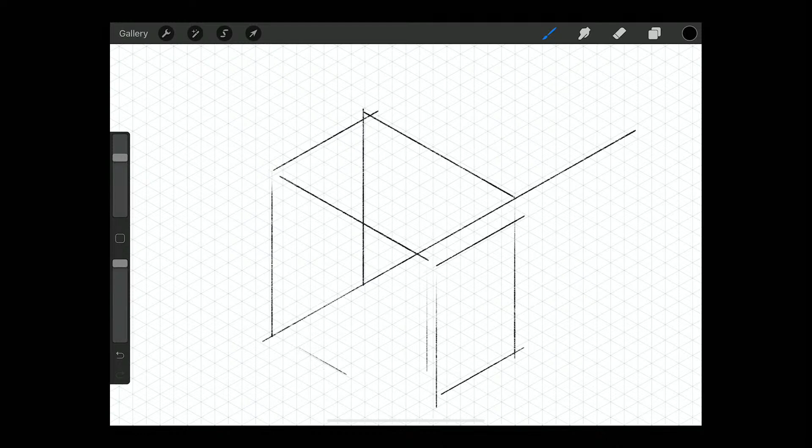And I've just found it really, really helpful for doing builds. The build that Jake just did, we did a sketch out of here and it was really helpful. So what I found is using the pencil, you can kind of get the overall shape really well. We were looking at kind of the design, and the good thing about this too is like you're not actually putting pencil to paper and having to erase, right?

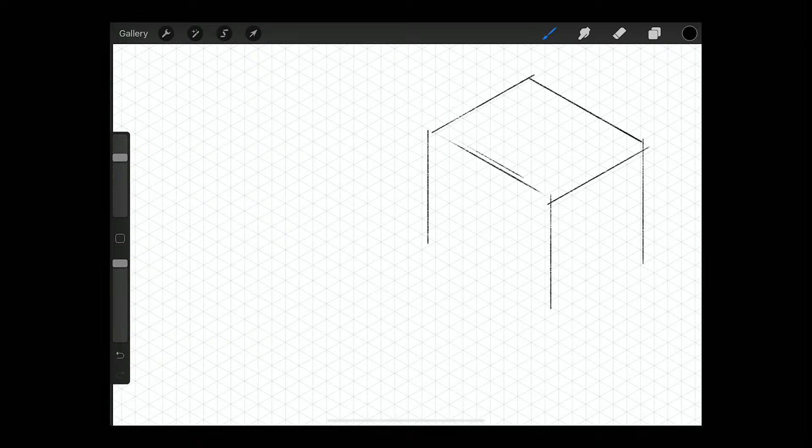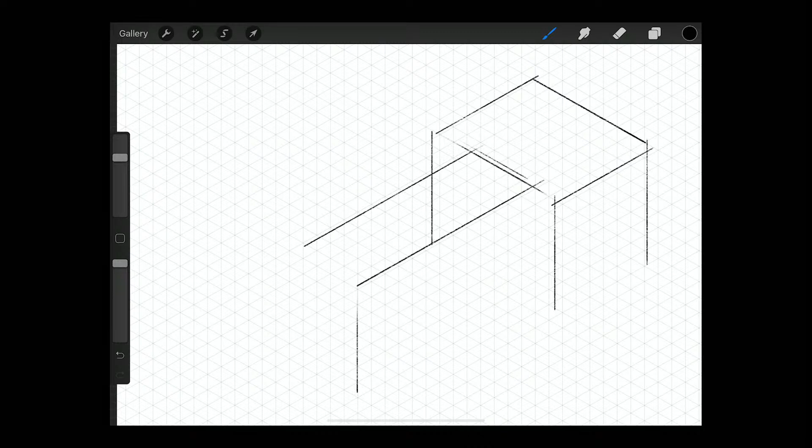So it's really easy to change your ideas, put something down without too much worry. So what if that was a platform and then you had a bridge like we were seeing that goes across, and then maybe goes into - it goes all the way across - and then we had that angled part, which could be cool. Let's see, oh, the kind of V-shaped thing - I think that's probably really easy to make with MakerPipe. Have a little section here and some supports there.

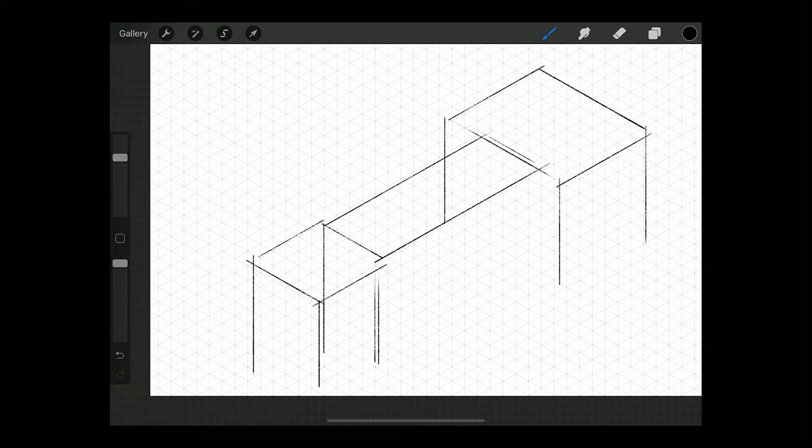And another cool thing is you can twist it all around and grab it and zoom it in and zoom it back out. I love this thing, it's awesome. So yeah, but here's where I can't - with the drawing assist, I can't do an angled.

Oh wait, oh that's not the right perspective though. The ground would kind of be in this region right here. I'm going to reference lines - you can do this on the left where you change the opacity. So if I wanted the ground lines to be a little bit less defined, could do it like that.

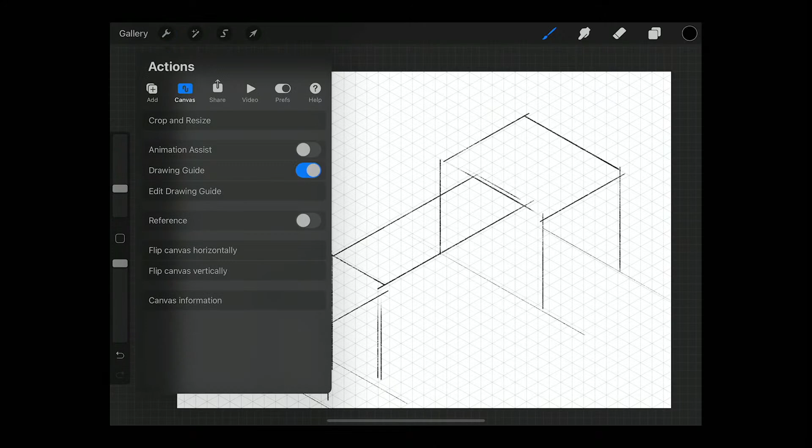Yeah, so let's take the drawing assist off. Take the drawing assist off, and then we can - now you're going to see my real sketching ability, which, yeah. That's cool that you can like hot swap between the drawing assist and then just normal. Yeah, I mean you can turn it off and on.

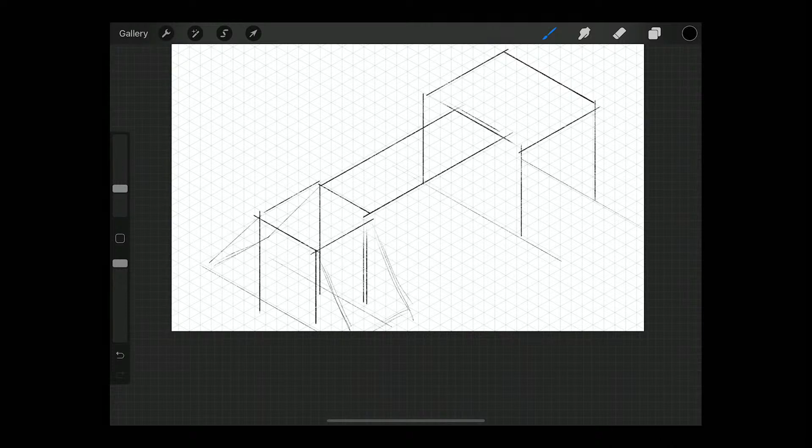And this is a neat feature too - like if you draw a line and then hold it at the end, it'll actually snap and you can move it around. So that's like the back side of the section there. And then I'm going to turn on the - whoa, see all Bailey's drawings. She likes this as much as I do.

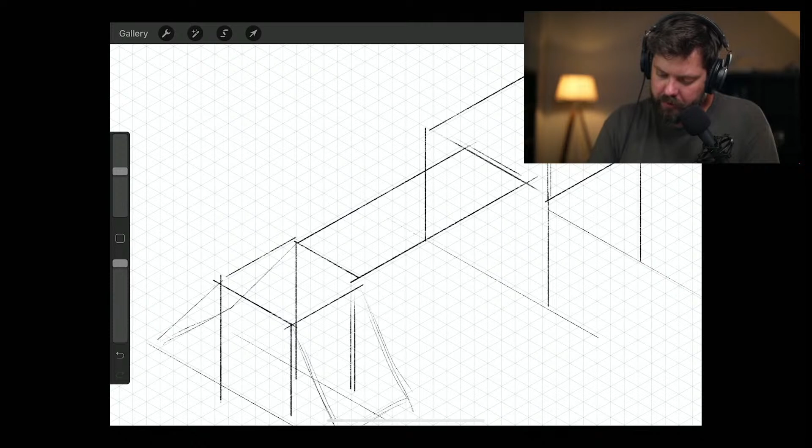All right, and then we're definitely going to need some sort of railing system. So that - you need a ladder, yeah? Yeah. Some sort of railing system over there, and then certainly to go across as well. Or some ropes would be cool there, probably.

I wonder if you could maybe run a T where you clamp it to the pipe, the vertical, and then you have the kind of - I don't know how to describe it - it's like the bottom is clamped, but you leave the top, you don't put a pipe in that one, and you just run a rope through it. Oh yeah, that'd be cool. I've seen that somewhere, I'm not sure. I know some - oh, with drone gates. Somebody did that with drone gates where they suspended a barrier, or it was basically a banner.

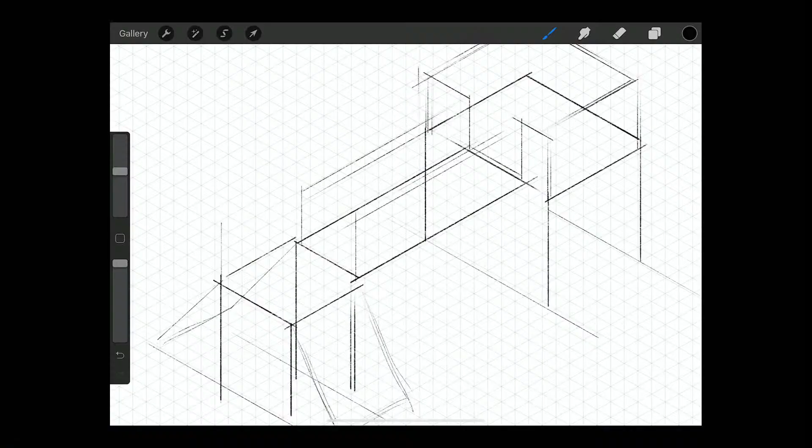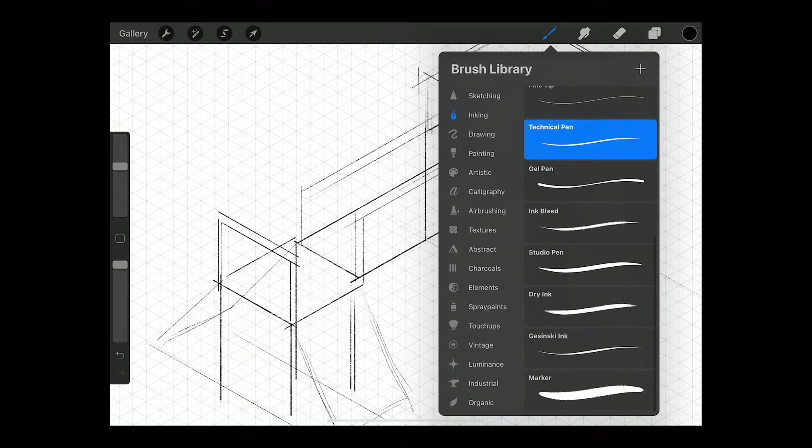And then we'll do kind of a section over here as a railing. So it's starting to take shape. And another cool thing is you're dealing with layers - so we did that all on layer 1, and then if we want to add another layer where we kind of ink it or get it a little bit more permanent, maybe do some different colors, then we can do that on a different layer. So I've been digging this studio pen as another layer, and again you can adjust the size over here.

So let me turn on the drawing assist again.

There we go, so we'll do this in silver. Start sketching out the conduit. Whoa, 1 inch is big. Yeah, it's a lot bigger. Actual size. Yes.

Something like that. Yeah, that's pretty good. Maybe we'll go a little bit darker.

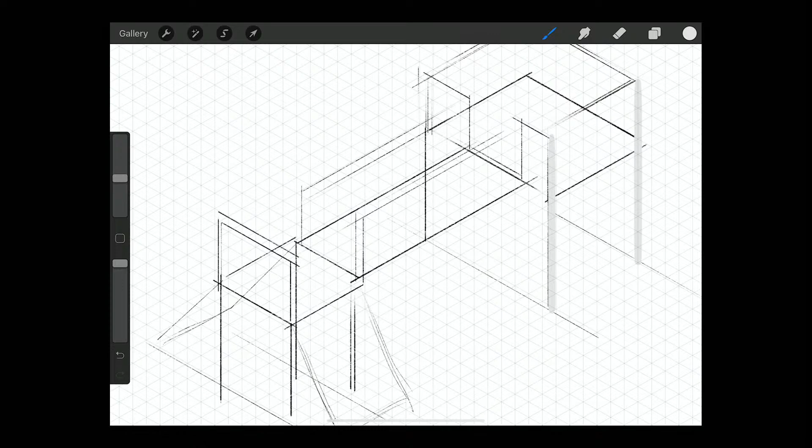I've always wanted to be like Bob Ross, rest in peace. This is my chance. Although, what does he say? There are no accidents, there are no mistakes, just happy accidents. That's good, Jake. Your generation loves Bob Ross too. Not to get the age thing again, yeah, I've watched my fair share of Bob.

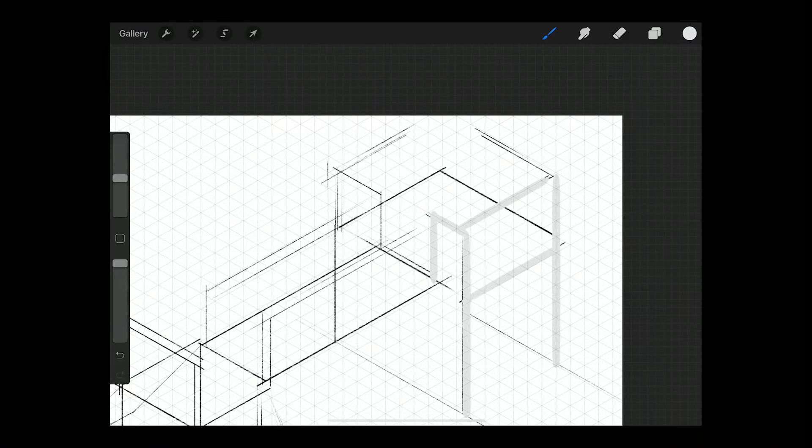They used to stream continuously, back to back to back, episodes of Bob Ross, which I think they might still do. I don't know if it's on the YouTube channel still. I think you can still watch it on Netflix. Really? That'd be cool. Yeah, I remember catching him on public TV, I think.

You know, he used to be a drill sergeant. No way. No way. Yep. He was a drill sergeant for like the first 20 years of his professional career.

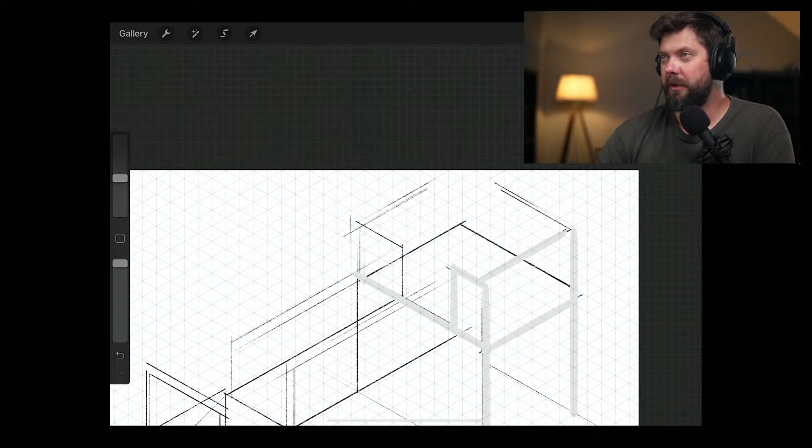Not that I don't believe you, but we've got to Google that. I promise. I'm Googling it right now. Fact check. Oh, it's coming up. Bob Ross, drill instructor. What? No way, look at that. His military career. Right on. Air Force. Cool, okay.

I would never steer you wrong with Bob Ross. Your Bob Ross knowledge is deep. Okay, we don't have to go.

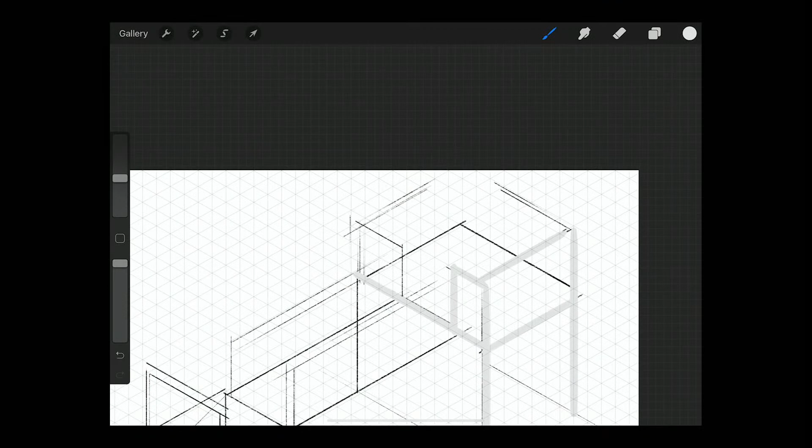We've verified that. Javier said he could imagine some glamping tents, certainly with 1 inch. Oh right, that would be cool. Have we had that? What do they call it, a yurt, right? Yeah. Fabric, correct.

I was trying to find a fun place for us to go for Dave's birthday, and I was looking at a yurt rental, and they seem pretty interesting. Yeah, loved by nomadic people everywhere.

My mom and sister just went glamping, I guess it was my sister's birthday, up in Asheville. They enjoyed it, in a camper. It was like a glamping, I think it might have been a yurt. But they enjoyed it, they were surprised. They weren't expecting to make it through it all the way. And they stayed and liked it. So, yeah.

Has anybody in the chat ever been glamping before? I'm not sure if we've got some glampers in the chat.

All right, so what I got here, I'm trying to think now, like okay, how would we actually lay this out if it was actual conduit, right? So I'm thinking a little bit more about structurally how it would be. And I think just a large rectangle, you'd have to anchor the 1 inch in the ground somehow. Let's see how we can.

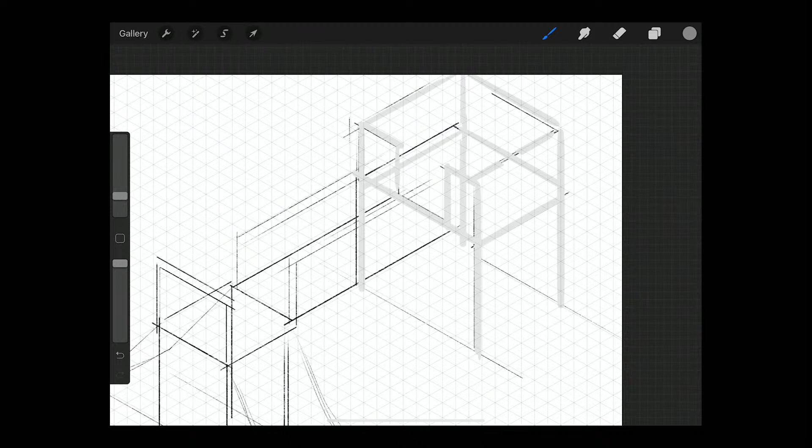You know what I saw? I saw one gentleman, he cast it into concrete and made a footing in the community. That was pretty cool. And then we had the kayak rack where he used kind of off-the-shelf footings that you can buy and just put the conduit on it, which I thought was a cool way to do it as well.

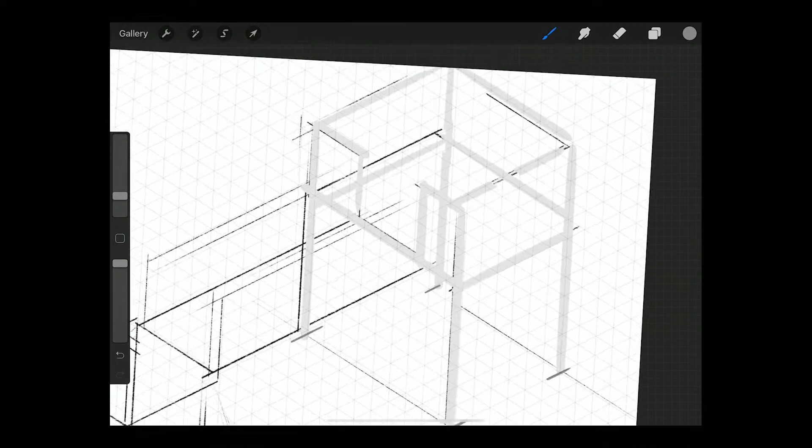I think I might check that out. But this is neat, you can take in any color that you've already done. You can look at that and bring that back.

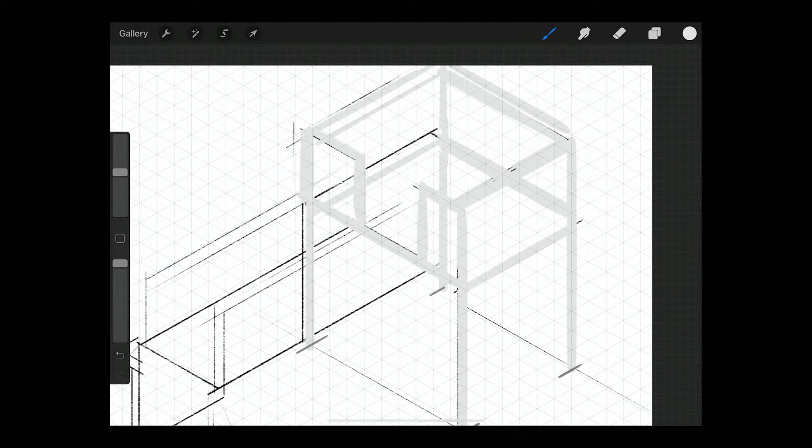Okay, so I've got kind of that structure where I've got 4 posts. This bottom outlines the base of it, the floor of it, and then some sort of sides and railings. I don't know what I'd use for the railings other than the conduit. And then these kind of branch over and interrupt with a T coming up this way and a T coming up that way. This would kind of go across there.

And then I liked somebody's idea, the pirate ropes. Yeah, Javier mentioned that was his favorite jungle gym activity. So definitely, oh yeah, right on. So instead of that, see if we can get some rope.

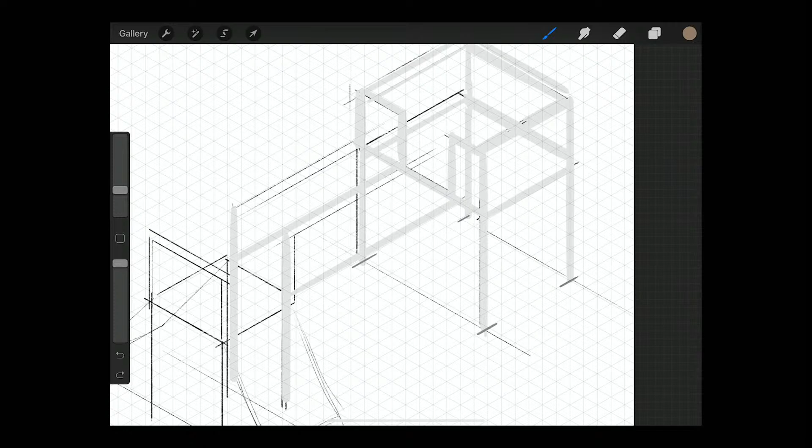Whoa, I think monkey bars make sense too. Monkey bars on the bottom. Yeah, that'd be perfect, good idea. So rope on the top and then monkey bars on the bottom, which would be challenging to get across for sure. Might be fun.

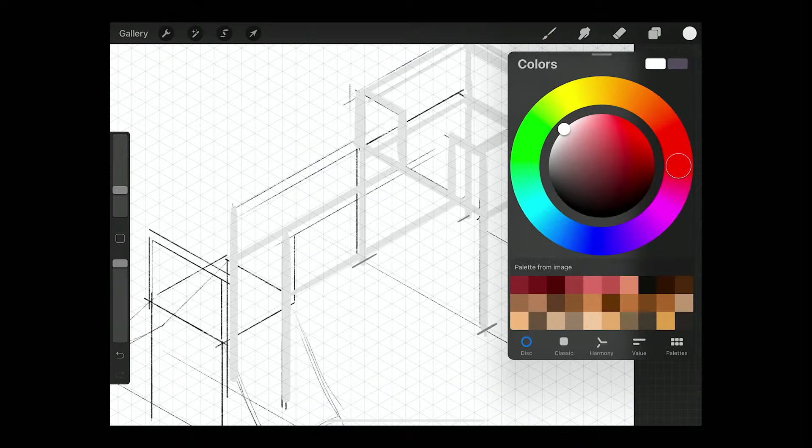What was I going to do? Oh yeah, take the assist drawing off. So I can do this rope. See if we can do a rope here. This is cool because you can draw in whatever direction you draw best.

Oh, on eraser - huh, if you double tap the pencil it turns into eraser, which is wild.

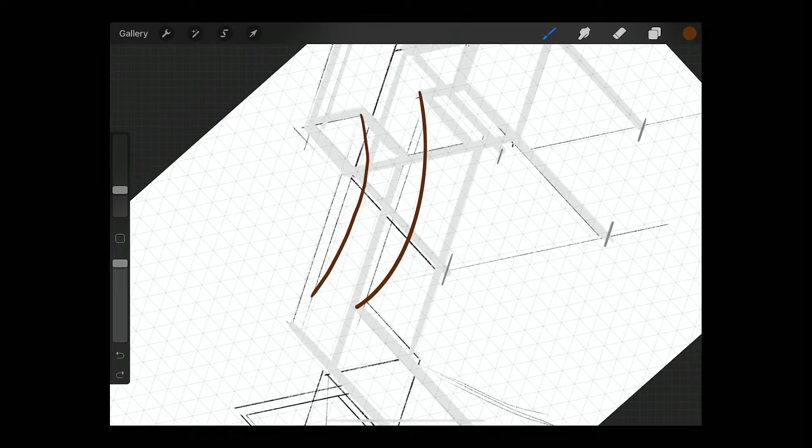Dave, you found a lot of videos that helped you learn how to use this, right? Oh yeah, I was deep in the YouTube rabbit hole, as one does. But there's a lot of tutorials where people draw way better than me, obviously, and that was super helpful to learn how to use the program.

There are the ropes, I'm happy with that. Yeah, looks good. And then let's go back to conduit color. And then I like that idea, Jake, of the monkey bars.

Oh, that's too big, so let's try that. Turn the drawing assist back on. And those go across. Whoops - oh, we've got a layer issue.

Let me go to this one. That'll put it behind - see how it's like a stack of transparencies. That's cool, and you can go underneath.

Old one. Oh, and then two fingers - you guys can't see my fingers, but just two fingers undoes it. So it's really easy to do that.

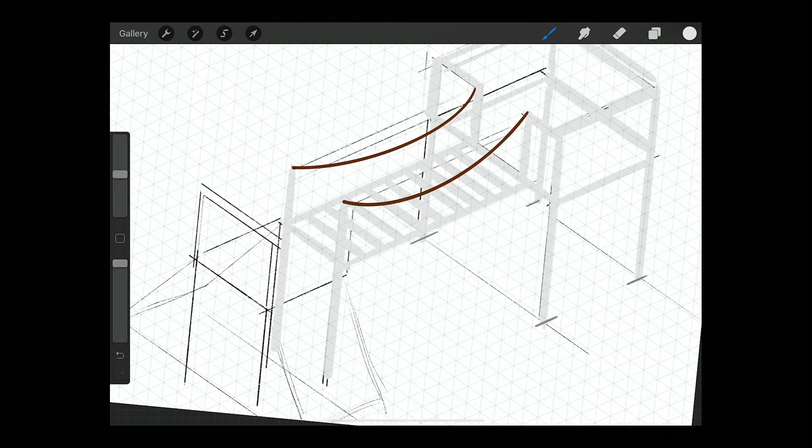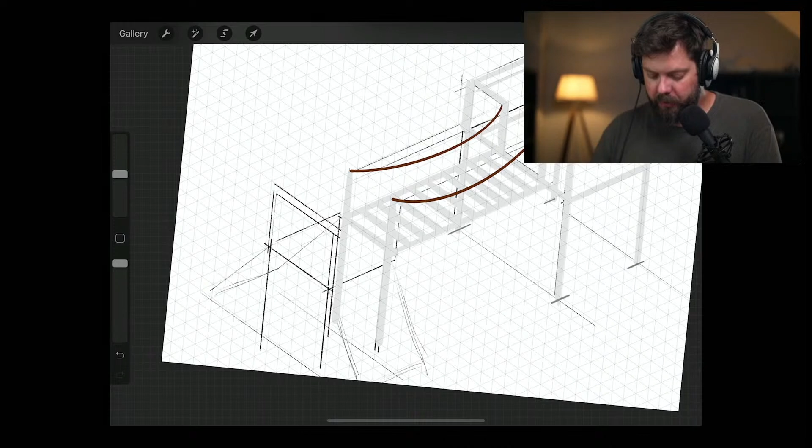That's looking sweet. So then she could hang from the bottom of that, monkey bars, and also walk across. Have to play with the spacing of that, but because it can't be larger than 10 foot probably, just to keep it the same size - one piece of conduit in between these two structures.

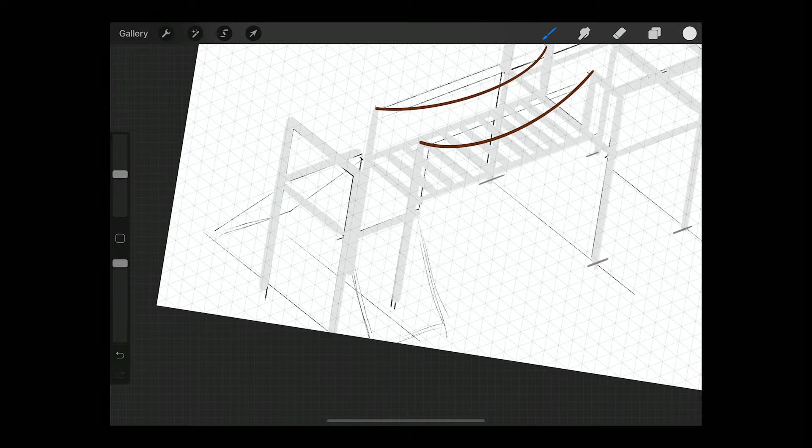And then switch back to that layer. And this side of it would be like that - bring these across, those like that. And then come down with the angled pieces underneath.

You guys are quiet. I know, I'm very fascinated, we're watching you. Yeah, I just stared at the drawing - I was thinking about the anchoring you were talking about.

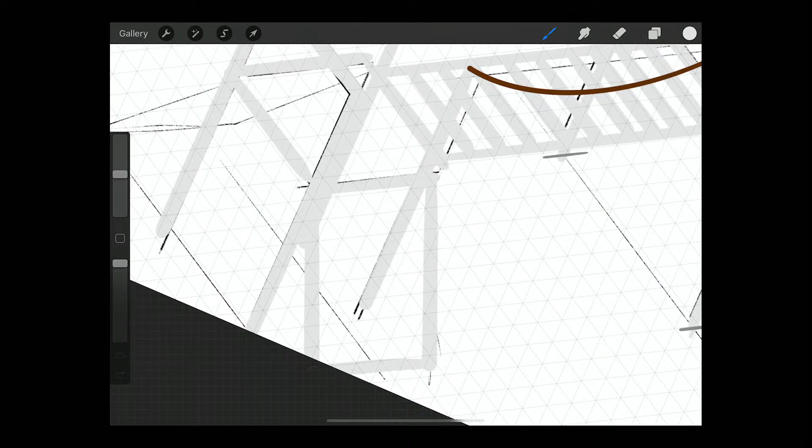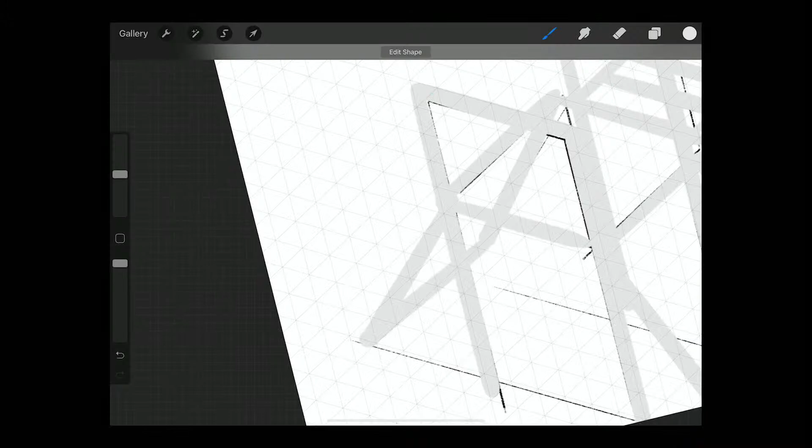Yeah, because I think the way people do it with normal jungle gym kits isn't very secure - not the best method, but if I remember correctly it screws into the wood and it's kind of like a hook you stake into the ground at an angle. I don't know, pretty sure. Is this something you had as a kid? We had a jungle gym kit from Walmart, I think.

I'd like to hear if anybody in the chat has ideas. With three-quarter, a lot of the times we've put rebar or stakes in the ground and slip the conduit over, but you don't want it to compact into the soil.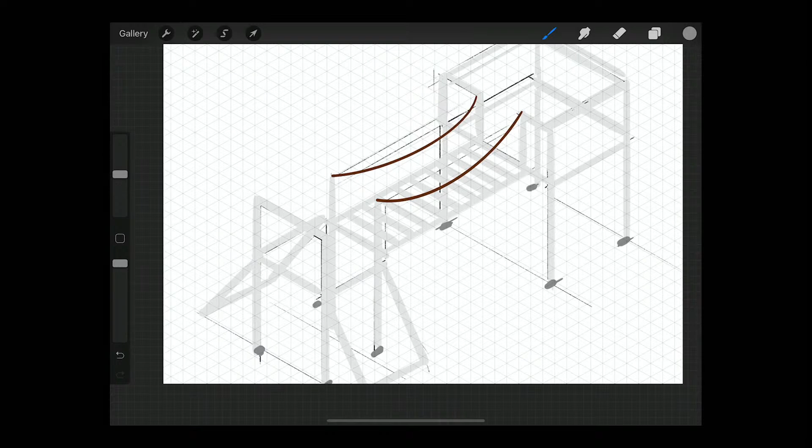Like if the soil gets soft, you don't want the thing sinking or shifting. And these are all the points we'd have to anchor down or have a footing. And then these side climber things would probably just rest there - they'd be fine just resting.

And I know what she'd be over the moon about, that I've seen at other playgrounds, is kind of a wall. Like a rock wall? No, they've had it on ground level - let me see if I can show you. You draw on it, or is it like? It's like a fake store front. Huh, okay. Oh, you know what you could do?

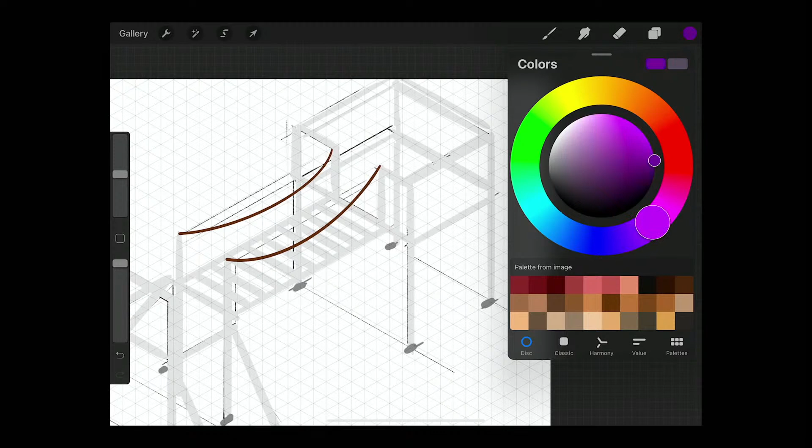You could put a sand pit area, dig down a bit, and put a sand pit in one of those squares. In my yard? You could just make - what are you trying? A leaf pile. Yeah, how about a leaf pile, Jake? There you go. Are you going to come dig?

No, I was going to say you might bury the structure, but that might be a little hardcore. It may not be necessary to do that much. If the way we decide whether to do it is if it requires heavy machinery - if we've got to rent heavy machinery, it's a thumbs up. But without that, there's not much excuse for heavy equipment. Yeah, you got to.

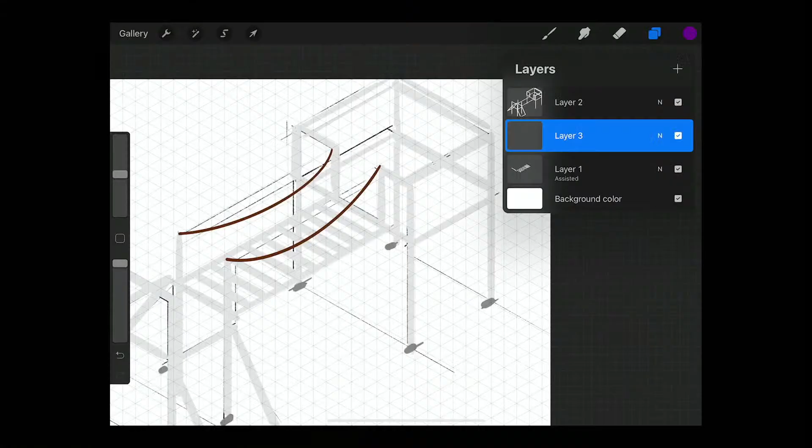No, but this wall I'm talking about goes kind of back here, and she has been really - she's like this, let's see, and it's kind of like a window. Oh, we need drawing assist for sure.

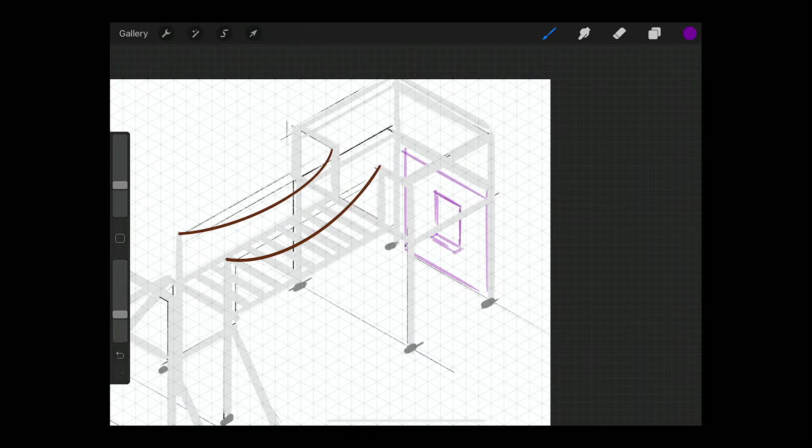Drawing assist - I remember something like that at a McDonald's play place. They had the slide section and you could go down underneath, something similar to that. There's a little window here too, and she likes to talk to people through it, pretend it's like a storefront. That'd be super cool - you could frame out the window with 3/4 or 1/2 inch material and integrate the two, going from these 1 inch verticals down to 1/2 inch.

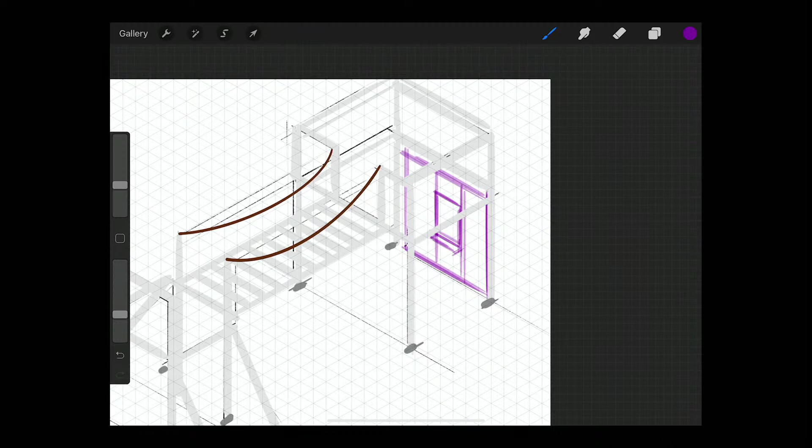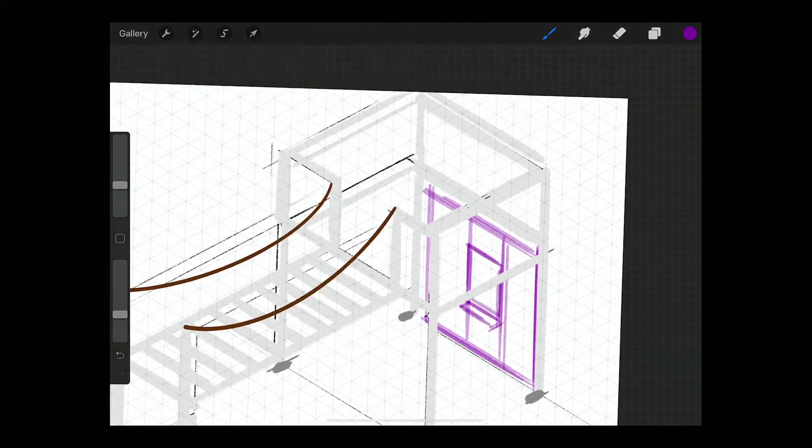Axel said put the structure posts in concrete - that's what he thinks would be needed to secure it. Definitely, we've seen that with a few builds, looks like a good method. Seen like Quikrete - just dig a hole, put the conduit in it, pour some Quikrete in, and have it set in place maybe. I don't know, I'm open to how that would work - somebody that knows concrete better, how you'd accomplish that, or would you do a form ahead of time? Not sure, love some input.

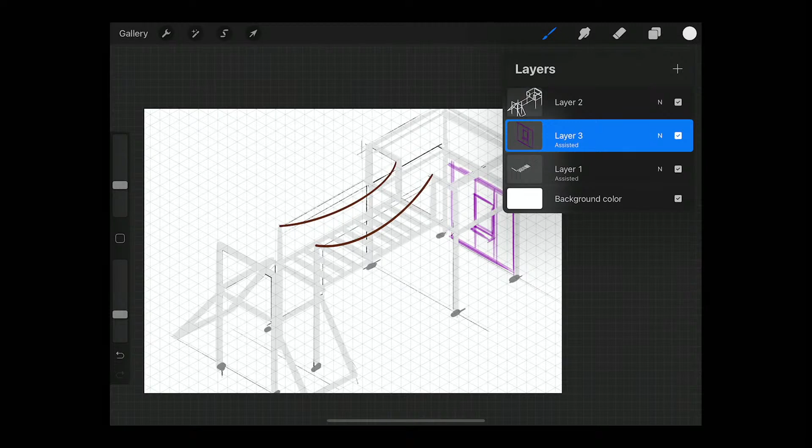So that's cool, what's some other stuff we could do? You got to put a pirate net - maybe on the left side, in the middle between the two angled pieces. Okay, so we need a ladder somewhere too. I'm going to do a new layer for all this stuff. I think it'd be cool to do a pirate net on one side to go off that. How's that? That's pretty good. Climbing net would be cool, and on the back side something like just a board with small pieces of wood maybe.

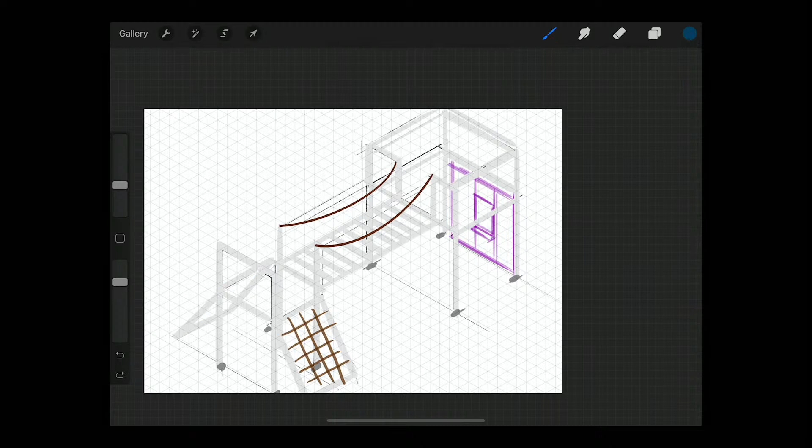I think the one I had as a kid had rocks on one side, like fake rock climbing - it was kind of hardcore to get up. You had to earn the slide. Oh, the slide - we don't have a slide. I'd put it over there next to the wall side. Oh yeah, near the wall, that'd be the perfect place.

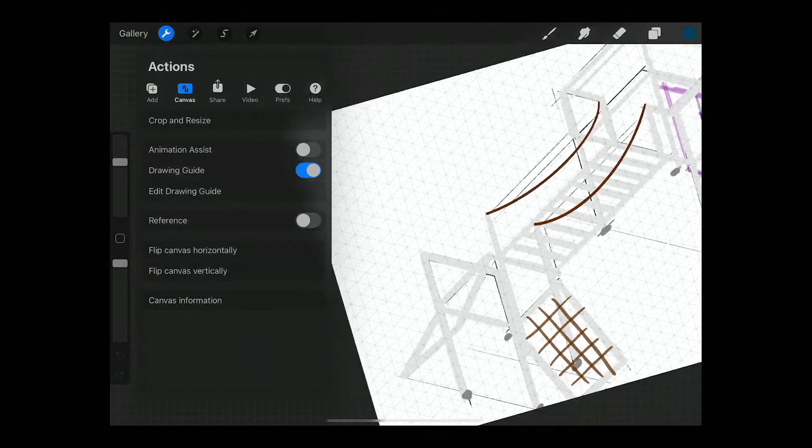I feel like we just got to get a little more wild - if we're going custom, we got to really do it, because I feel like I could just buy this. MK Gadget said instead of a storefront to make it a drive-through. Oh yeah, that's awesome, I like that idea, that'll make it unique. Make a little maker pipe go-kart or something to ride past the drive-through.

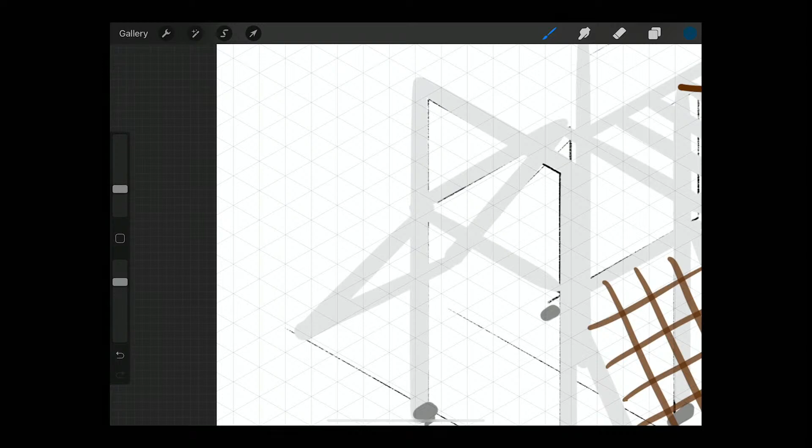We've always wanted to do that, like a roller coaster train. Oh yeah, I don't know what's going on. I'm on that layer - can you name layers? You can, yeah. Oh okay, I was just drawing behind. So this will be - oh, this is cool, check this out.

You can make a rectangle - you won't be able to quite, that's bad. Draw assist, right, okay so you make a rectangle. I think I completed that. But then you can take your color and then - nope, too much, oh boy.

First and last Bob Ross live stream.

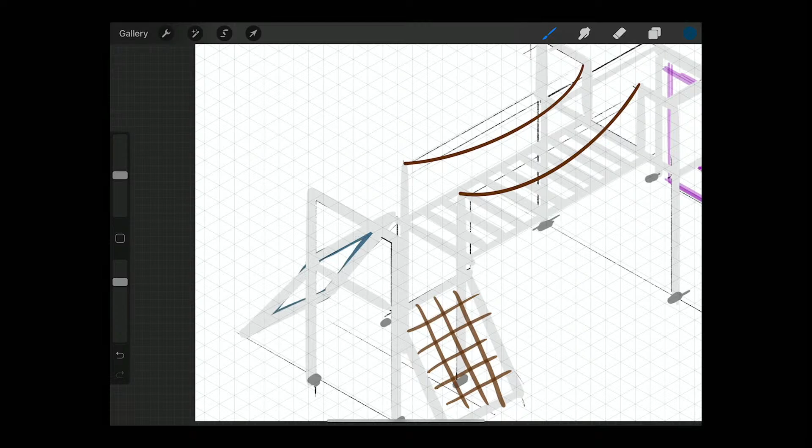You got to connect it there, right, and then you can go and drag it. Darn - is it connected in the bottom right corner? Oh, oh nice, there we go. You got to adjust your threshold. There you go, okay so that'll be like the climbing slanted piece with wood or whatever.

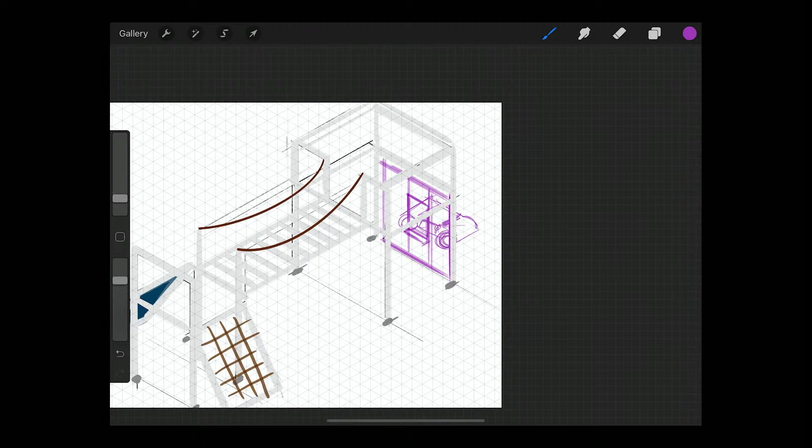Here's the, got to do the drive-through. Get a purple. Javier said think like the Ewoks and do the whole playground around a tower, around a tree, and then connect them all. Oh yeah, that'd be awesome, we have plenty of trees. And what's super cool is Bailey is really into Star Wars right now, which is a total treat - she just loves Star Wars, so she'd be totally excited. There's my rendition of a car back there - and it's driving through, nice.

Axel said Quikrete would work with a hole or tube. Oh yeah, a tube, right?

What if you did a tube insert and then threaded a rod into the ground, into the concrete? You like, I don't know, that probably doesn't make sense. Well, you see those telephone poles, light poles, street lights, or flag poles, a lot of those things set threaded rod in the concrete and then attach to that. I don't think you're totally far off. Could be a good idea to make it removable, but at this point it might just mean to set it into concrete.

I feel like this is pretty ambitious. So what are we missing? The slide, right. How are we going to make the slide? As a kid I always wanted a slide. This is kind of off topic. Sort of, it's about the slide. I wanted a slide for a bunk bed, even inside, because when I was a kid I had my own room with a bunk bed, even though I slept in there by myself. I always wanted a slide off the top bunk so I could wake up in the morning and start the day off with a nice slide. Heck yeah, that would be a great way to start off the day.

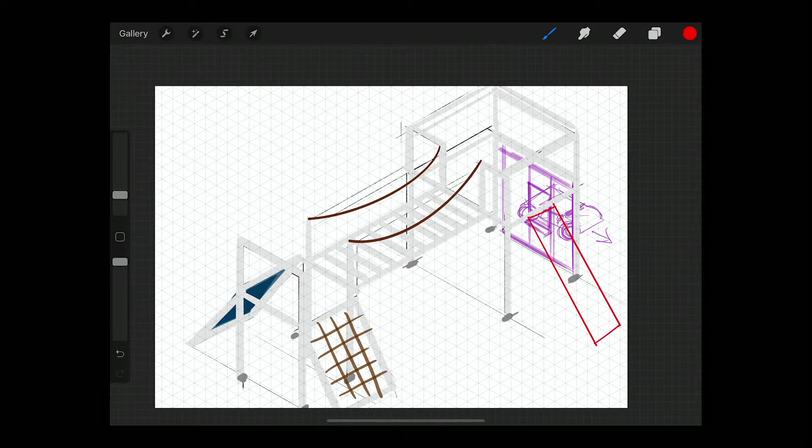You might need a place to rest when you get to the top. Ooh, flags on top of the towers, from MK Gadgets. Nice, now we're going, now you guys are thinking. This is awesome, if my drawing can keep up. Javier said just to make a whole Ewok town, connect them all, and have enough connectors to make a whole town and bridge between them. I love it, which would be a really cool airsoft course. Yeah, it'd be kind of gnarly.

Oh look at that, that's a good flag I think. A flag or a slide? No, we're doing a flag. MK Gadget said, oh do a flag. Gotcha, I was looking at the slide. Do a Maker Pipe logo on it.

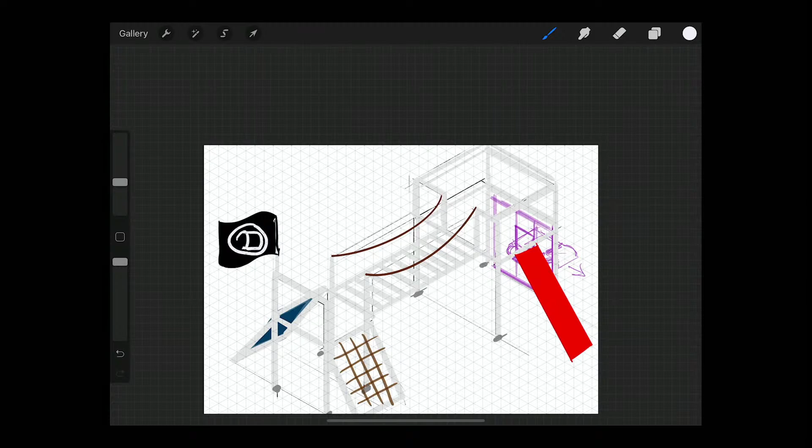Right, let's see, should be able to draw my own logo. Close enough. Oh no, just put a smiley face on it. No, it looks like the moon. How does the logo go? Oh my gosh, that's embarrassing. It's like the half moon now inside of the circle. Okay, I got it now. Looks like a shim almost. I mean heck, I drew the thing originally. Oh yeah, nice, there we go. Okay, sweet, got it, okay.

Nice, oh did we get everybody's? Did we capture the fire pole? Fire pole, okay, who made that? Javier? Yep, all right on Javier, let's get that fire pole going.

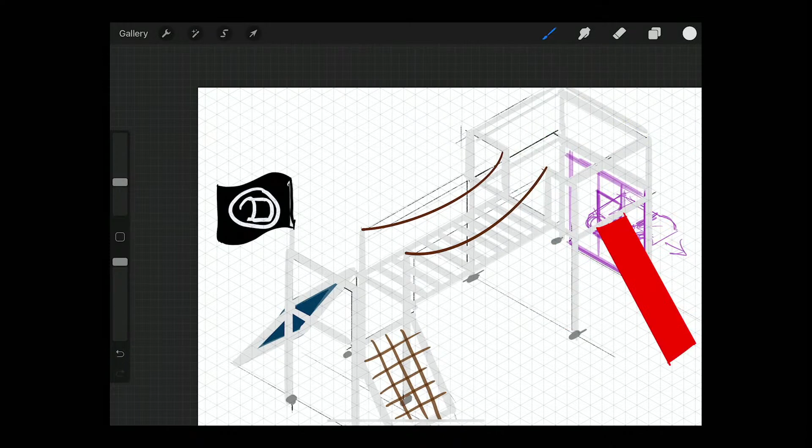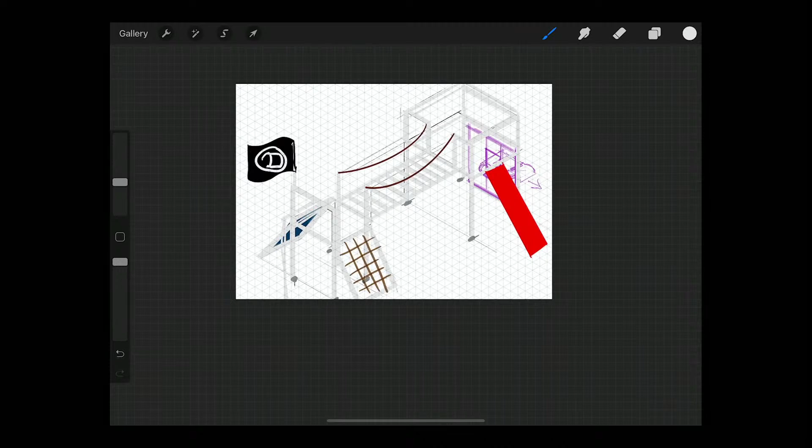Oh, you know what you could do? You could branch off from the angled side and then do it down the middle. I've seen that at playgrounds, public parks and stuff. Branch off on the angle side and do it down the middle. You kind of have to lean towards it, like I've seen at public parks. Like over here? Yeah, there you go, yep, kind of something like that. Yeah, I've seen that pretty commonly. Yeah, that's what I was kind of thinking off the back side here. You've got something that connects it up top and then down to the bottom, something like that.

Javier said add some more flat surfaces and we'll have an X-Wing too.

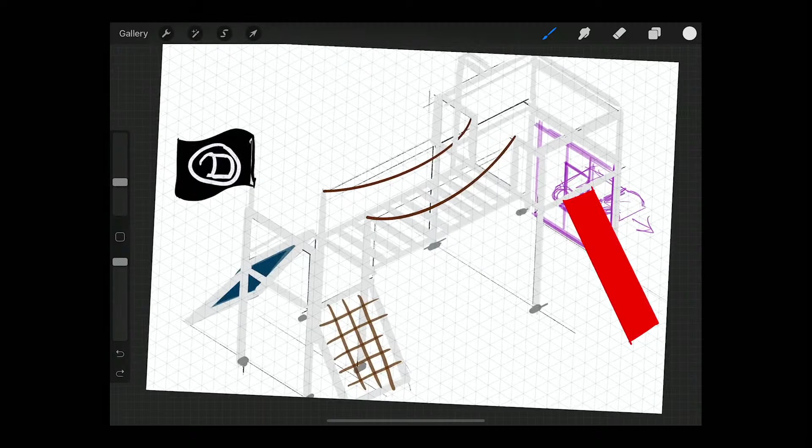Nice, Javier, Star Wars fan, we can tell. I like it. What's your favorite Star Wars, Javier? It beat me to it, I was about to ask. Oh really, we want to know. Favorite Star Wars - anyone else in the chat, definitely.

I think mine's episode 4, the OG, the originals, New Hope. Those, it's hard not to go with those. I really like 9, the last one of the new ones. That was good.

Kelly? Bailey always likes to watch 7, right? Yeah, that's the first one with Rey in it. I'll go with 7. I'll have to tell her - I told her today I had to select a soccer number for her, and I said 7 because it was lucky, but now she'll think it's great. I'll just reference Star Wars and it'll be fine. Nice, lucky number 7.

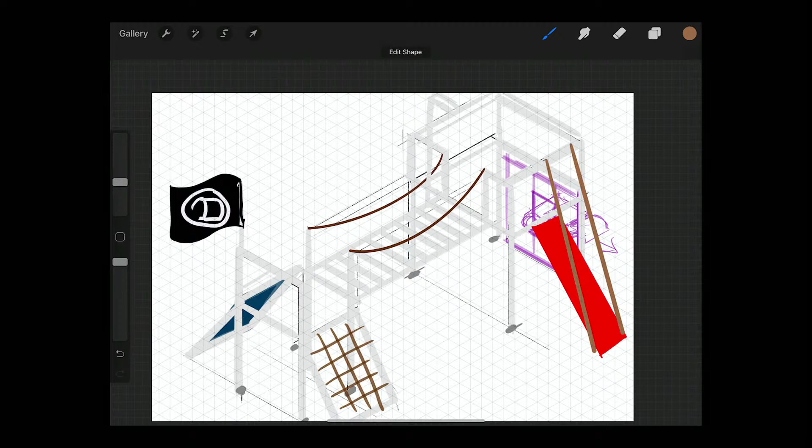Axel said a drawbridge slide. So I guess you maybe pull something and the slide goes up in the air. Here, we're adding some ropes to this - this will be the drawbridge part of the slide. Put a lava moat around it - it's Bailey's fortress. She loves the floor is lava. She's stoked - she gets this whole episode live stream about her. We'll have to get her critique afterwards.

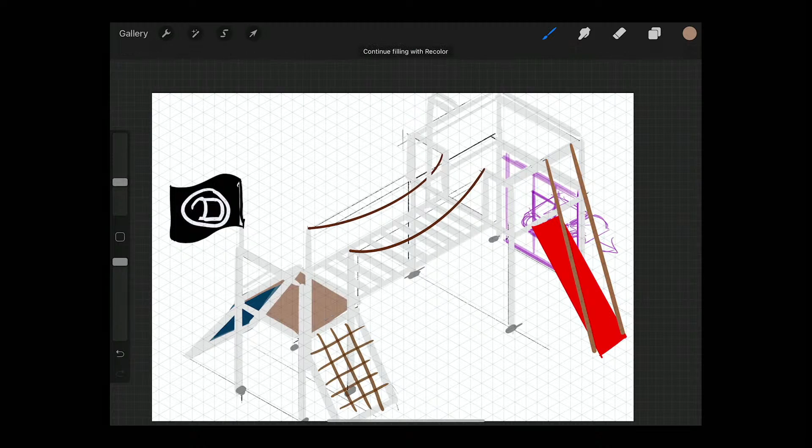What should we use for the deck and everything? Oh, that doesn't work. Wood? Yeah, I don't know, wood would probably be good. It's coming down in price - that looks horrible, I was looking at it earlier. I think a full sheet of plywood was like $35 or $40 for a sheet - really, which is really low compared to like a month ago. That was for the rough, unfinished plywood, but still - yeah, once the good stuff, the hardwood plywood gets to about 50, we'll be back in business.

Javier says Return of the Jedi. Yeah, that is a good one. He says he likes the jungle scenes and the trees, which I like - I like that one too. I feel like we looked up where it's filmed - it's in the redwood forest in California, where the sequoias, is that sequoias? Across from the Golden Gate Bridge, that national park. Like Yosemite? No - oh gosh, someone from California is gonna absolutely flip out.

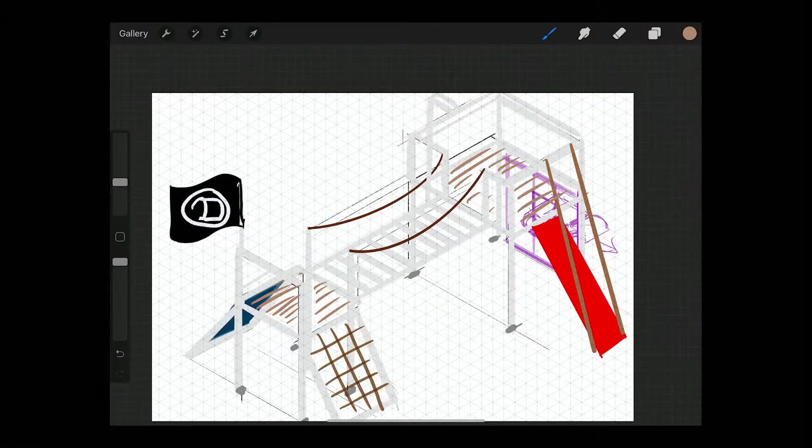Well, it's the giant redwood trees - I just forget what national forest that is. Is it the Redwood National Forest? I don't know, I'm not sure. Someone can educate us on that - I've seen it, that's where it was filmed. Oh cool, that makes sense. All right, what else? We got a heck of a jungle gym here.

Javier said maybe make also a Lemonade Da Vinci Bridge. Leonardo. Oh, where am I getting lemonade from? That's what I get looking at the chat kind of farther away. That's funny. I was like, what's a Lemonade Da Vinci Bridge? Oh wow, nice.

What is a Leonardo da Vinci Bridge? I don't know if I've seen Leonardo da Vinci's bridge. Leonardo da Vinci. I saw you cheating off Javier's spelling. I was looking down. Oh wow, Javier - oh, this is cool.

Nice, oh my gosh. He said he thinks it would be cool with 1 inch EMT. Yeah, oh you know what, I've always wanted to do a bridge over a river or creek. Let's check this out - I think this makes sense for Maker Pipe. It looks like it does at first glance anyway. Oh, so they cross underneath each other.

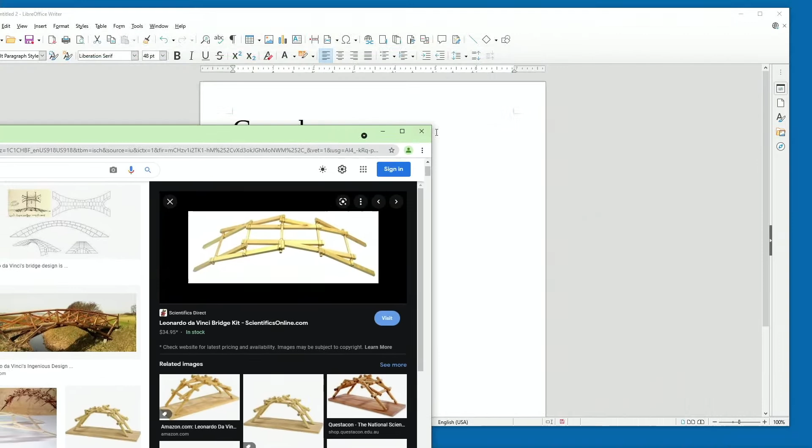I wish I could make this a larger size for you guys. You can try to save it if you wanted to, pull it up, or maybe do it in a new tab. Scientifics Direct - look at that, $34.95.

Okay, so yeah, it's underneath the cross pipe in the middle. And then, wow Javier, that is amazing - I've never seen that before. I haven't either, that's so awesome. And obviously, I called it Lemonade Da Vinci. Ah, that's cool, and it packs away. It kind of looks like Jacob's Ladder - yeah, in a way, but that's great.

Awesome, Javier says that the bridge stands alone with pressure, but will be super secure with connectors. Right, yeah, I can see that, I think that's a great idea. Have you built one before? I can't spell Leonardo da Vinci - DAVINCI.

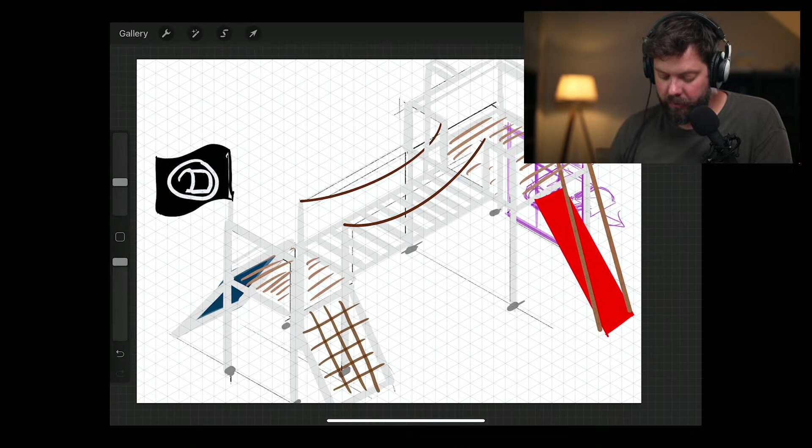All right, so let's finish this off with some connectors, see where the connectors might be. Because we'll only have T's, we'll have to stack a little bit and offset them, which isn't a big deal. That'll go across, tee up there, a T, two more there, stack them there. You can branch off on that, put one down all the way to the ground.

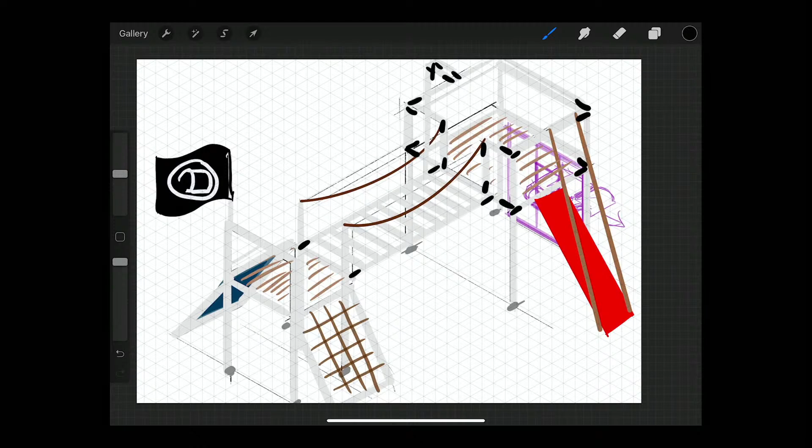This will be pretty connector intense. But actually, the Leonardo bridge would be sweet right here instead of doing all these. That would be a neat touch. It would be a good experience doing that.

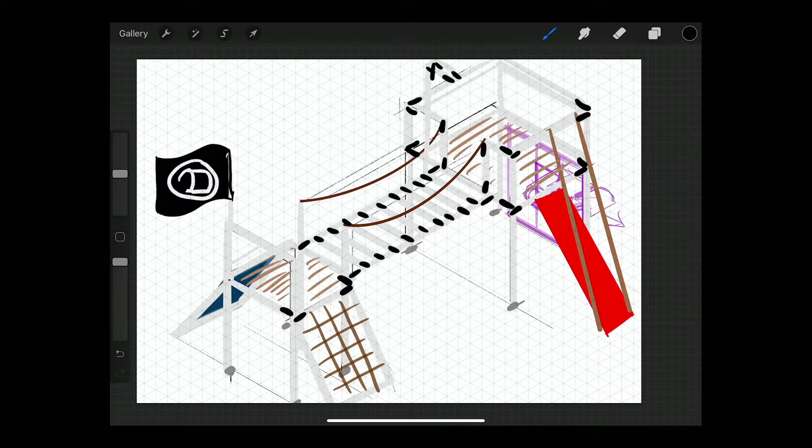Just T's across like that. On this side, similar sort of thing. I think keep that vertical continuous. T there. And then these sides would have to grab on the inside there. No, we don't need one down there. That would just go into the cross piece. And these would grab on the inside as well. So base, more or less, that's what we're working with.

It's not a crazy amount. I mean, it is a lot, but the monkey bars is really where it's connector heavy. Yeah, without the monkey bars, definitely could.

Because I'm thinking, what would be the highest? The highest would be something around here, where it's from grade up to 10 feet. And then you'd want probably 10 foot there as well to use one pipe. And I think that would put maybe the platform 6 feet off the ground, something like that, which is actually my head height. That's pretty tall up there. It'd be high enough, but not anything crazy.

But that may not be such a bad height considering how tall she is. Oh yeah, it's going to seem enormous. Well, no, if she's hanging from the monkey bars or something. Right, yeah, 6 foot high. She's about, yeah, that'd work.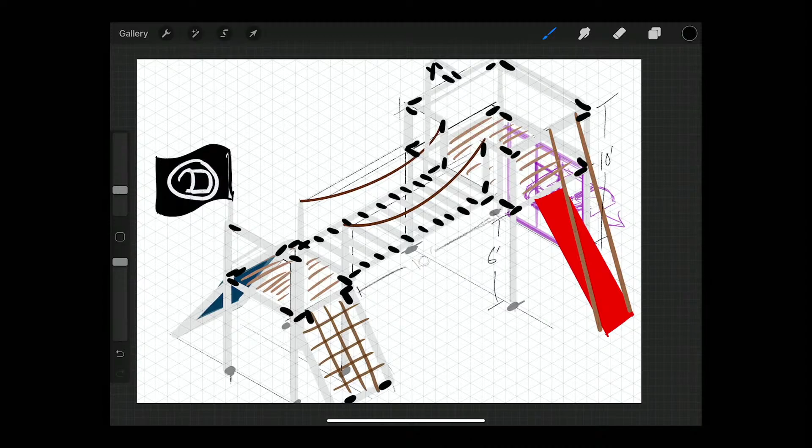And I think that's a good drawing. Thanks everybody for the input. That was fun on my end. I appreciate you guys helping me build this jungle gym for my daughter and design it out. You guys didn't help build it, but if you want to come over and help build it, more than welcome to as well. And then we got another bunch of cool ideas for bigger builds: greenhouses, sawhorses, tiny house, which I'd love to do. I have this dream of making a maker pipe or conduit house in the woods, tree house, jungle gym, grow stand, bunk bed, camera dolly, and Leonardo da Vinci bridge, which I absolutely love. That was a fantastic thing you turned us on to, Javier.